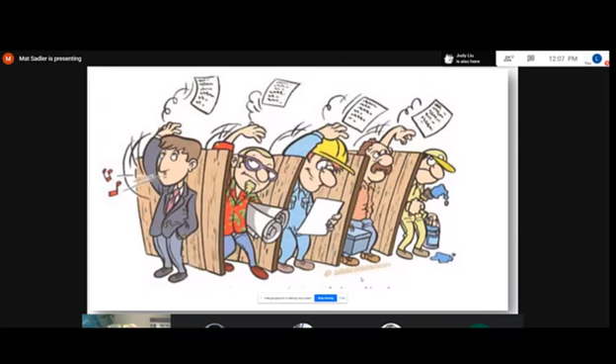We've covered most of this off in terms of the reasons why we made this transition. The whole point is to work smarter and safer. What we found is about one-third of major projects end up in some sort of dispute. Of those, almost one-third are based on poor specifications. So really what we're trying to avoid is everybody doing their one part, throwing the paper over the cubicle and saying, hey, I'm done, I'm out. How do we keep everything together and work in more of a collaborative environment?

That is a very, very fast overview on NBS. Are there any questions before we jump into the demo? No, you guys are easy. Has anyone heard of NBS before? Take that as a no as well. Yes? All right.

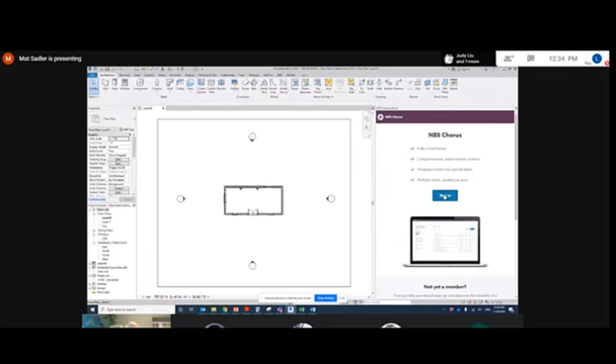All right, we'll hop into Revit. Maybe an uneducated question, but does NBS cover everything: architecture, mechanical, electrical?

Minor civil as well. Let me hop back and give you a better example of that.

Great, thanks. Yeah.

All right, we'll hop into Revit. It's going to give me an error here because I didn't log out on the other platform, so just bear with me for one second.

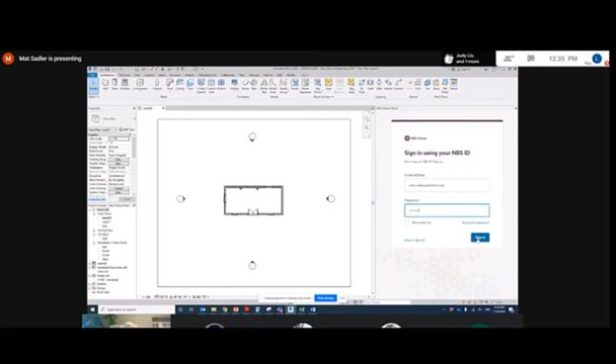Any questions that you guys have on the platform on what we covered a minute ago, you can ask me while we're here, and I'll still be able to answer it.

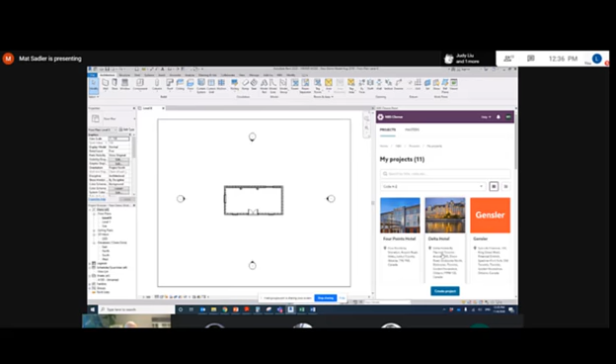So what you'll see is we have Revit, and then we also have our NBS plugin. So anything that we were able to do within the cloud environment, we can actually do from within the plugin within Revit as well. So we're going to hop into our hotel project that we created.

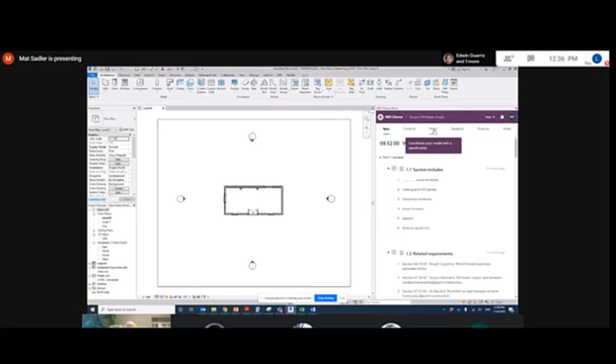We're going to go into our sample CMS master, and I'm just going to click on an item here. What you'll see is up at the top, we've got a couple of additional items. One that you'll see here is called model. So if I click on model, we've done absolutely nothing aside from log into the plugin, and right away you can already see all the items within my model that haven't been associated.

So the first thing that I'm going to do is go and associate some stuff. So I'll take this window here, I'm just going to say it's a wood window and associate with the model. You can get down and associate right at an article level, but I'm just going to keep it at a section level for the point of this demonstration. Click on associate, it takes two seconds.

For this window here, I'm going to say that it's an aluminum window, not that they're used often anymore, and do the same thing. Now I'm going to click on this door, and I'm going to say that's a flush wood door, and associate that really quickly.

So a couple things have happened. Right away you'll see a little icon showing what items have been associated and what haven't. If you'll realize I only associated one window here and one window here, but the system's smart enough to know that this window here is exactly the same as that, so it automatically associates all the other windows that you've done in your project. Similarly, if I click on this one, it knows it's an aluminum window as well, that it's the same as what we put on here. And if I click on the door, you'll see my specifications come up right away.

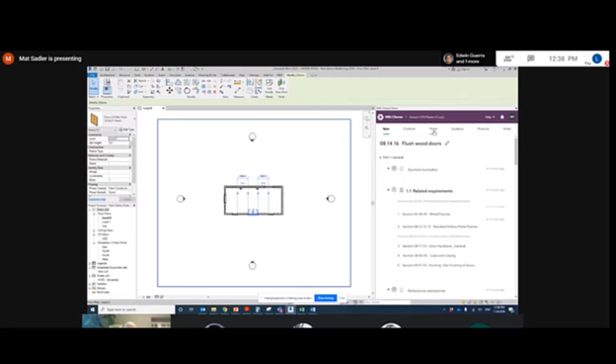The other thing that it does is it tracks what's been associated and what doesn't. So if anything happens at this point in time, if your specification is removed or if something on your model is removed, it will give you an error report. So let's take this door as an example. We remove the door. When we scan the model, we now see there's an issue. If we click on it, this door in this specification, the object is now missing within the model.

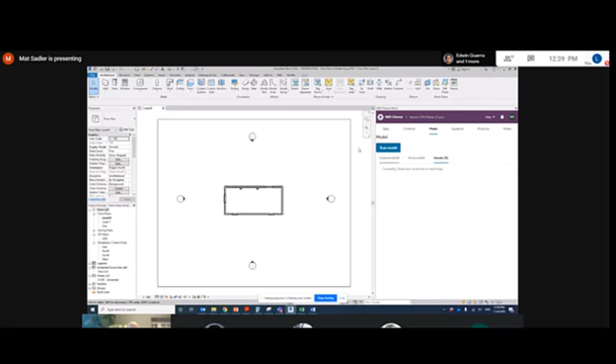So I can either go and fix it, or I can say that was meant to be that way, so I'm going to unlink it. It helps design a true digital twin of what you're trying to do with specifications right down to the model. This also really helps eliminate any of those last minute issues with specs not matching up with models, with changes being done at the end of a project and so on and so forth.

And then we can also annotate if you want. So you can sit there and say, hey, those are my aluminum windows or those are my wood windows, and add just a little more detail to your Revit model itself. So it's kind of a very high, quick level overview of the Revit integration.

One other thing I'll show you is when we do integrate into the model, we do it at the family type level, and you'll see that there's three very specific small lines of NBS data that gets added in, and that's how the specifications link directly to the model themselves.

Are there any questions on the Revit integration side?

Hi Mat, sorry, go ahead. I think someone was speaking at the same time. You want to go first?

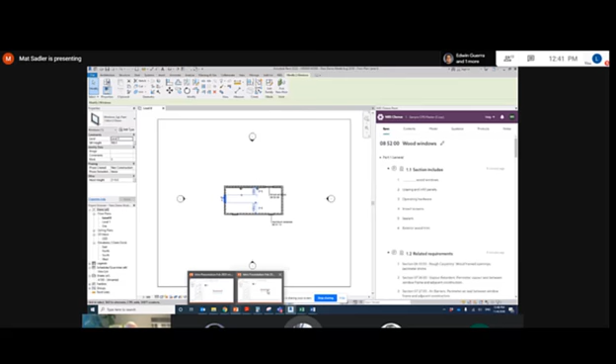No, go ahead. What if you have specifications for the same family of windows, but one is for the second floor and one for the first floor? How do you differentiate that in the specifications? Or even for doors, if you're using the same family in the model, but depending on where the door is, you're going to have a different specification.

It wouldn't typically be the same, so you'd associate the different specification at that point. So the door wouldn't be exactly the same within the model? Oh, you create a different family then? Yeah, as an example, if you had an interior door that didn't have to be fire rated, you would have a separate spec for your exterior door that had different requirements.

So within your specifications, most likely you're going to have a separate one. Or the way you can do it is instead of doing it at a general level where I associated it specifically as just an aluminum window, you could get down to the article level and associate the more detailed attribute so that you could do the different floors uniquely as needed. Awesome, thank you.

Was there somebody else out there? Yeah, so you've shown where you open up the model and you have a sample spec that has content, and your model starts to link the elements to that content. But what if you had nothing to begin with? Basically, you create a project, and what you're trying to do is create a spec for the project you're working on, like an architectural model. What would the workflow be? Would MBS be able to generate a basic spec section for you, just based on scanning the models?

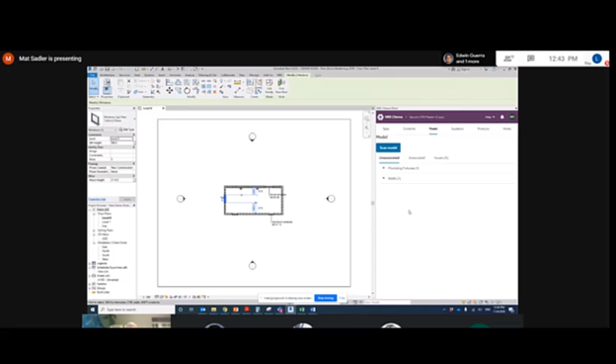I absolutely love the way you think. As we move forward over the next 18 months or so, I do believe you'll see things starting to go there. So what you're saying is the reverse, if I understand it right. If I had a model that was built, could I automatically pull in 85% of the required spec sections, so I start from there instead of the other way around? That's correct, because that's how the design process works. Spec always comes last.

Yeah, and that's the goal, to move in that direction. But today we're going from an outdated way of 30 years of piecing together Word documents and trying to keep accuracy in the spec writing world, and we're trying to digitize it and get to that first level. The evolution you'll see in the future will be a change to automation of model to data. It's an evolution we'll see, but it isn't something out there anytime soon. It's an excellent question, and it's the dream, if we call it MBS 3.0.

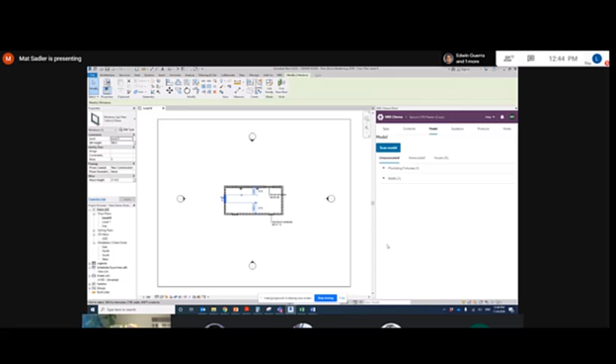Now, that said, when you do absolutely nothing, like what I showed when we first logged into the plugin, as soon as we clicked on model, we were able to see everything that was unassociated, regardless of whether there were specifications. So we would know, for example, that I need a plumbing fixture specification.

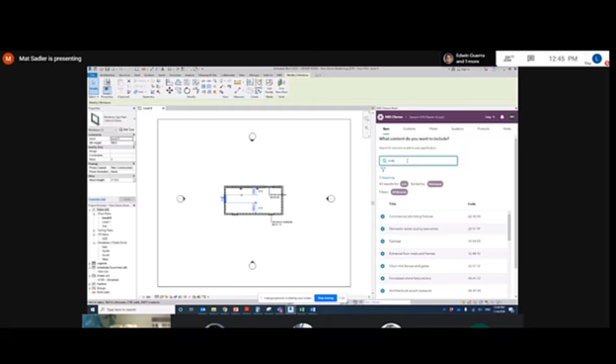So if I go into my content, I see that doesn't exist. The other way of doing it would be to go and search for what it is that you need. In that situation, we didn't have plumbing fixtures - you can see we have some sinks over there. So I went from a model that had nothing.

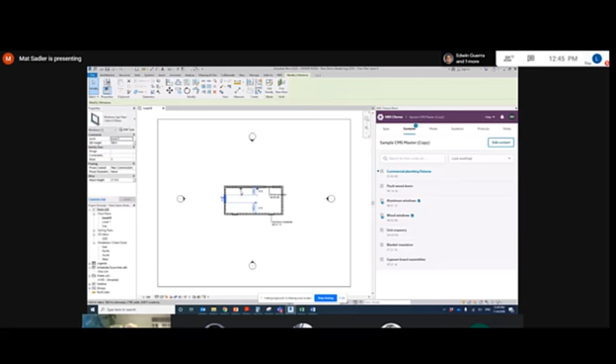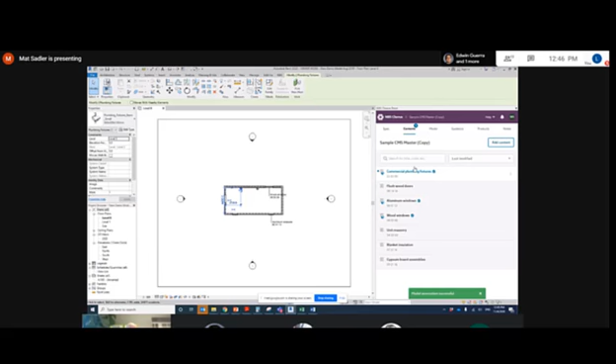I added my plumbing fixture, and I could now go into my model, select my sink, go into my item, and go down a level and say, instead of just having it as commercial plumbing, I want to associate that sink. So you could start your specifications from blank with a scanned model that shows you what you need to go search for.

But most people today still have their models and specifications as two different groups - they haven't quite got to that level yet. So you can do part of it. I'd just like to get it to the next level of automation, where you're able to scan the model and automatically have all those sections brought in without me having to search for it. That automation will come - it's more of an evolution we'll see. So you can do it already, I just dream of a day where everything's even more advanced than it is today.

The other thing I didn't have time to show today, but is a good example: on a wall, when you associate to it, you can associate multiple layers. So you could have your brick, your insulation, your gypsum board, and so on, all associated into that one item. You can do multi-layer associations as well.

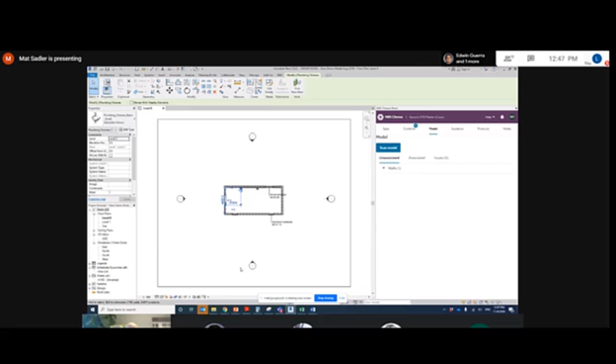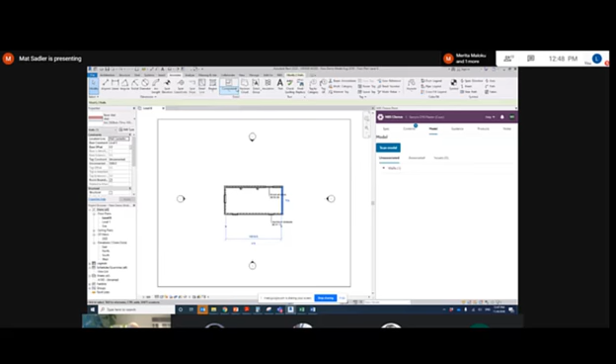Do you have time to show us how? Because a wall has different material layers, so do you actually have to go to each material and associate that to a spec? You'd have to go and associate each one, the different layers. I don't think I have the tags loaded, but if you give me a second, we can try.

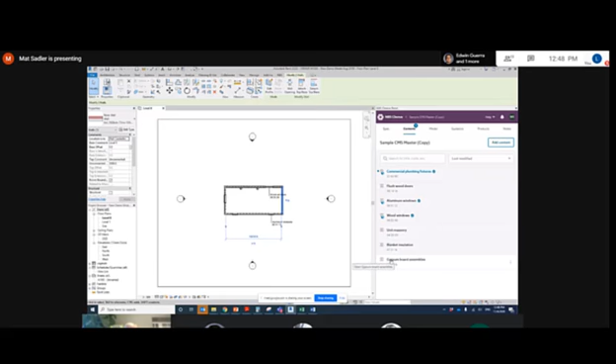So we could take our basic wall here, and we could say okay, we want to have a brick layer. And maybe we wanted to also add whatever other materials you want. You could get right down into, I haven't filled out product information, but you could get right down to whatever detailed layer you wanted within that.

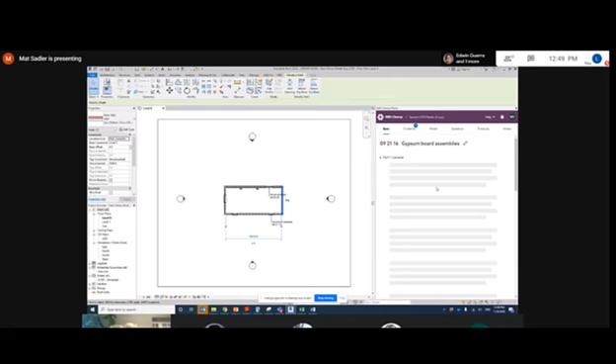Whoops, my apologies, clicking on the wrong button. And so it's showing me here what I've associated and what I'm missing within that wall. I think it was that one. No, did that wrong. You'll see my Revit skills are not quite up to the same level as yourself.

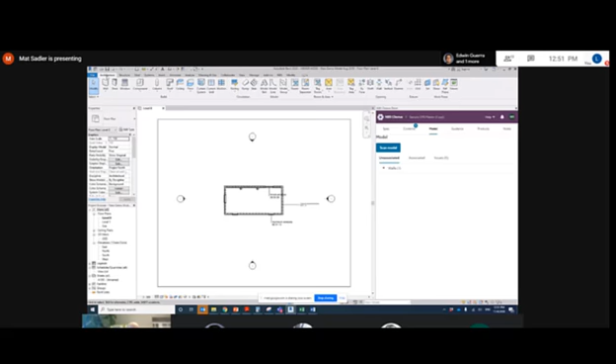And so when I click on it now, it's showing it's going to be a layered object, and it shows me everything that's in it.

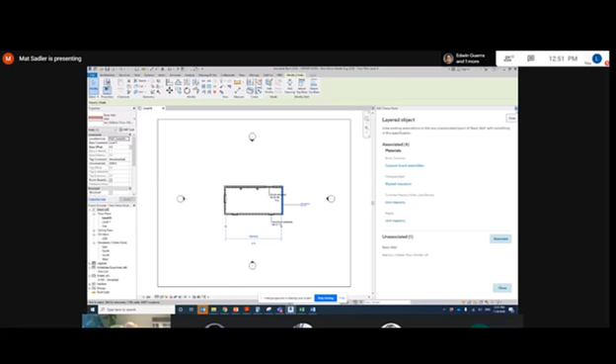We can go in and do a separate section for you on some more advanced ways of doing the multi-layering. If you guys really want a mid-technical level on the Revit side of things, I'd set up a time where we'll bring in David Watson, our director of technical sales, and he can answer all your Revit questions.

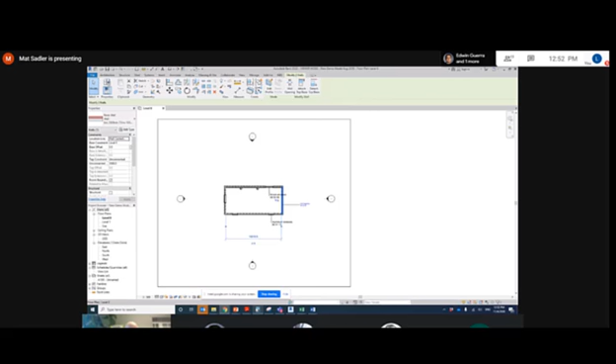But high level, does that give you guys an idea of something that you didn't know much about? Yep, I think that's good.